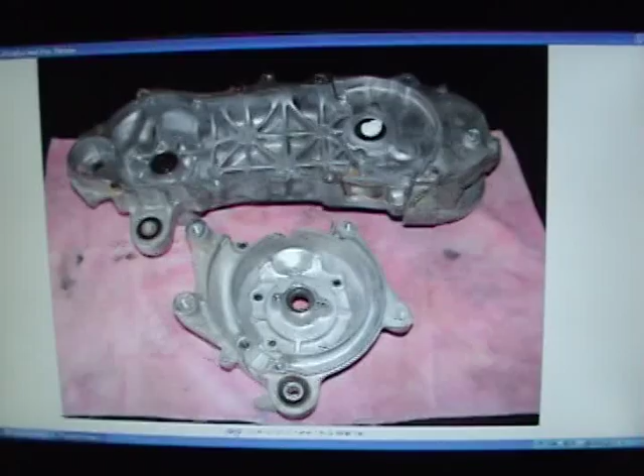This is going to be a long series on how to build a stroker from the ground up, starting with the engine cases. I was going to put it on rental and make a few bucks, and then I decided, well, what the hell? If we don't teach the young or help people out, what the hell good are we?

So we do it all for free. I know I'm slow, but just pay attention to the pictures. This is two halves of the engine. This is where your magneto goes, and this is the one seal that usually goes out.

If that does go out and you leak oil in that case a little bit, you won't have any high-speed runs. I've had two of them go out over the years.

There's your rear. What I like to do with these is take both sides of the engine, clean them up, and then run them through a dishwasher. That way it gets a lot of the crap off them, and then you can very gently scrape off any excess gaskets.

And you can see right here, this is where the oil pump went. It ran off the crankshaft, but it's not there anymore, so this plug will go right down in here. And that's important for a future deal.

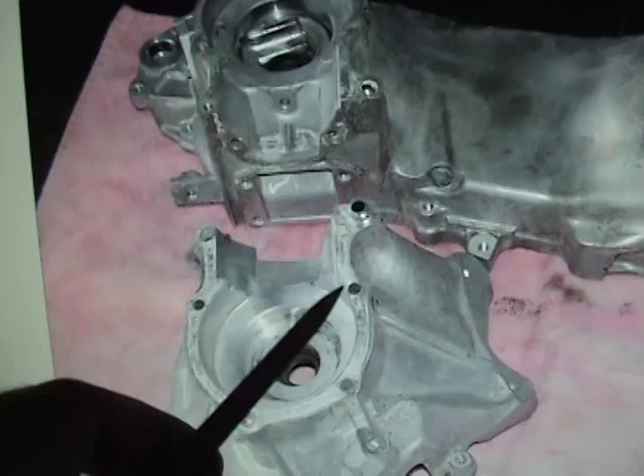And here's both cases on the insides. Now you can clean them and do whatever you want. On this area right around here, right around the case, this is where the mating half, here and right up in here. These cannot be nicked or touched. There is no gasket right here, so these have to be airtight when the cases are brought together.

This case will go onto here and the crank will go between them. So you want to be real careful about aluminum, because once you take it off it doesn't grow back.

And here's the intake side. There's where your starter goes. You won't need a starter with this big engine because usually it won't work. 98cc might work, but the other one doesn't. So you want to keep everything clean.

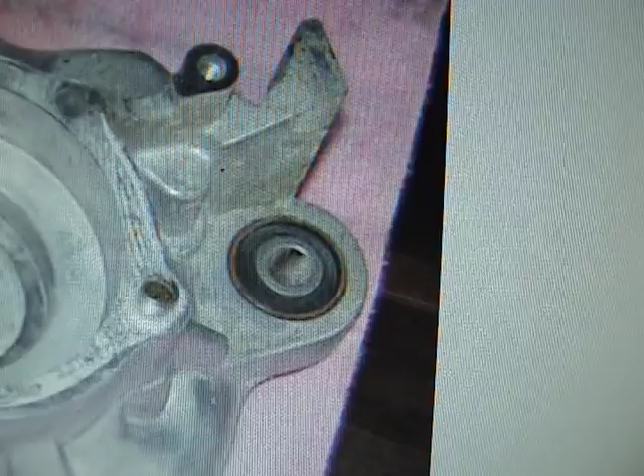These are your engine mount rubbers right here, and they don't come out, they'll just sit right there. This is where your oil filter, oil pump plug goes.

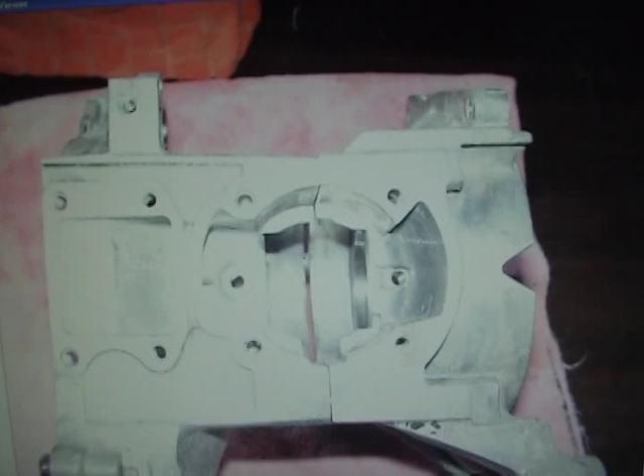This is a picture of looking down the barrel of the stock case, SR50 AF16E, I believe.

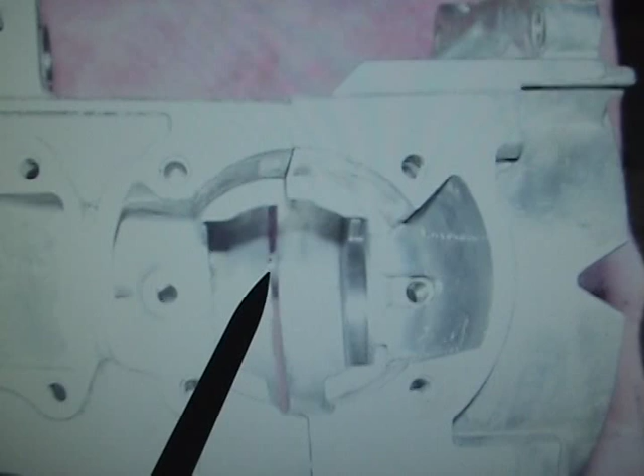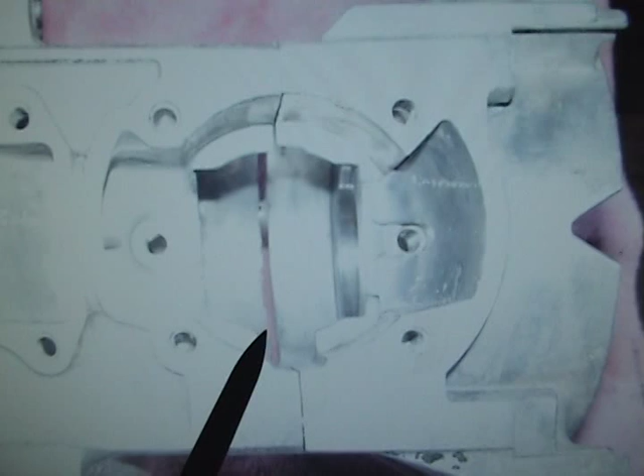Now these pins right here, there are two of them, I believe. There's one down here in the bottom and another one up here and here. Now, this is normally closed right here. I left it a little bit open to show you how the cases close together. If I pressed another 1/8 of an inch, then it would close it up.

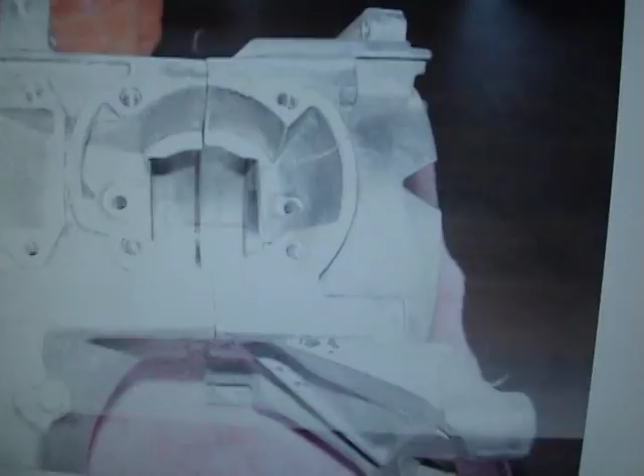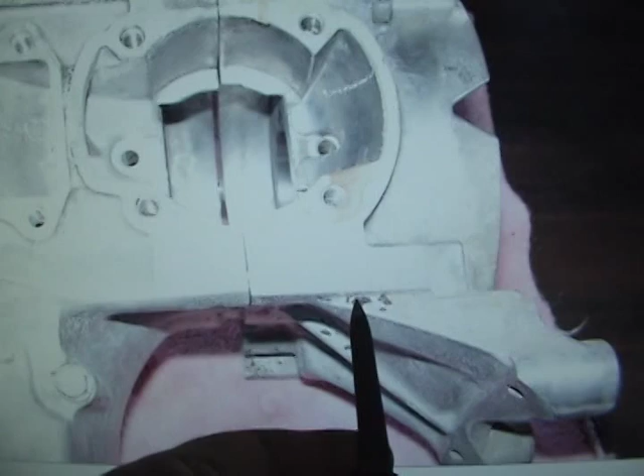Now the rear tire is right here, but all of this case here, and all the way down, all the way around the bottom and up here, must be sealed. There can be no air leaks here, no air leaks up here. This is your intake for one side of the cylinder, and this is your other side. Your variator is on this side. Your alternator flywheel is on this side.

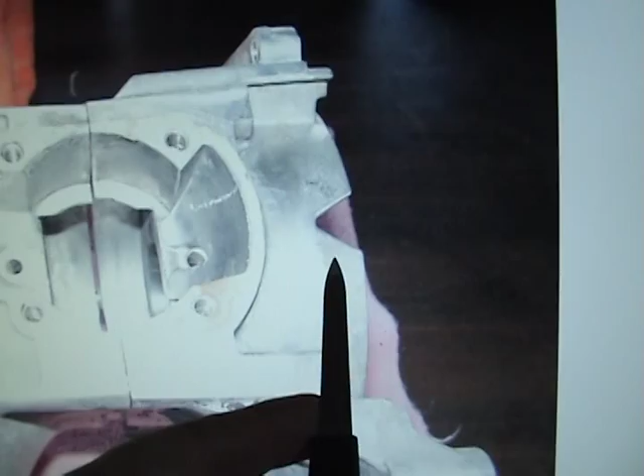Now, after you take your motor and put it in the dishwasher, you may have a little bit of gasket that needs to come off. You want to be very careful with that. Put some hot water on it, scrape it off a little bit. All this white on here is where the aluminum has little pits and holes in it like human skin, and this is oxidation.

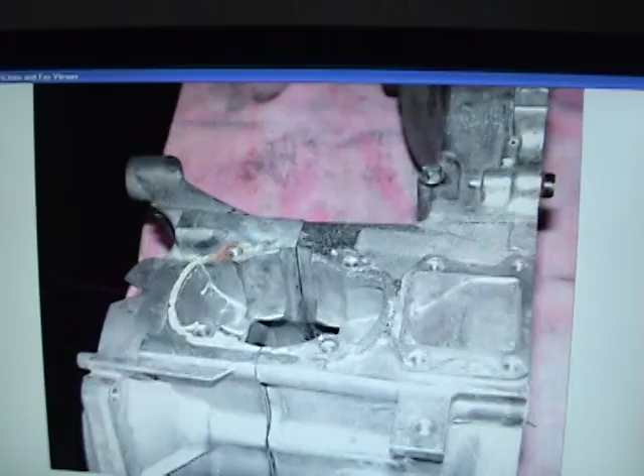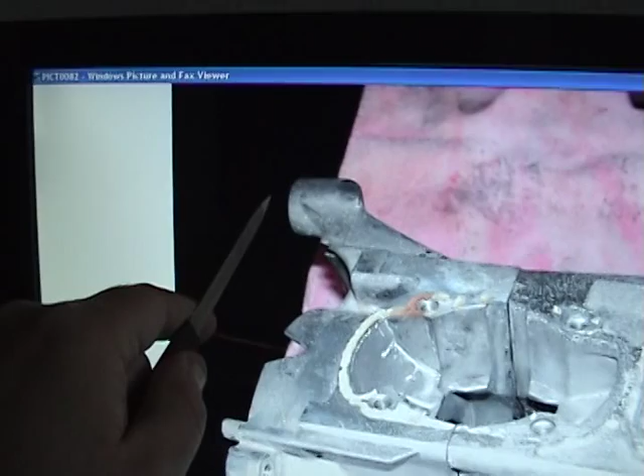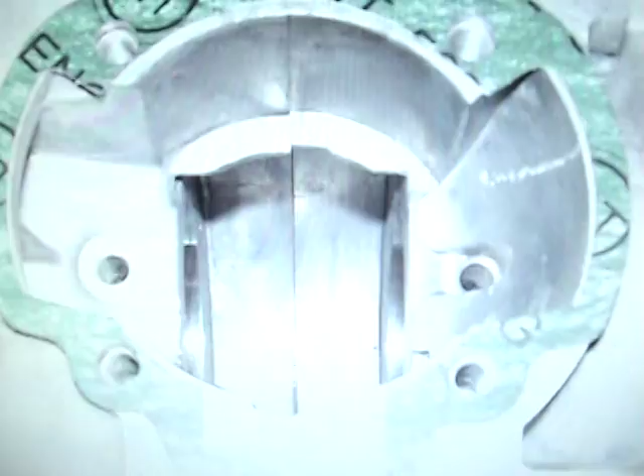Okay, now we have a 114cc Charmo cylinder up here. If you'll notice right here, this gasket was cut out especially for this cylinder, and you can see how much meat has got to be taken off the front and the back right here.

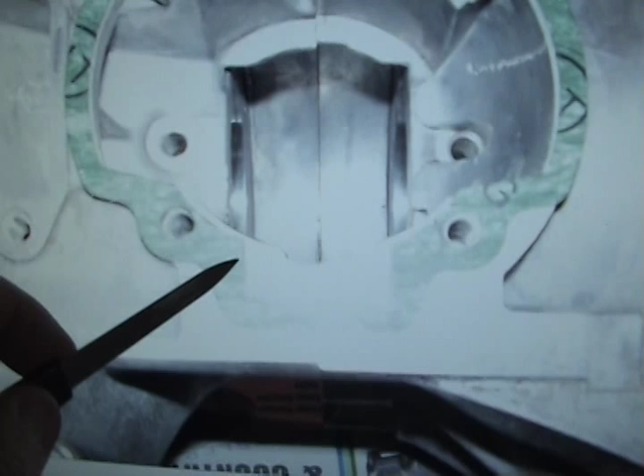And this is the area that's got to be cut out for the boost port. The stock boost port cutout is right here. Let's see if I can get a better picture on that. Yeah, this is your stock boost port cutout, rear boost port.

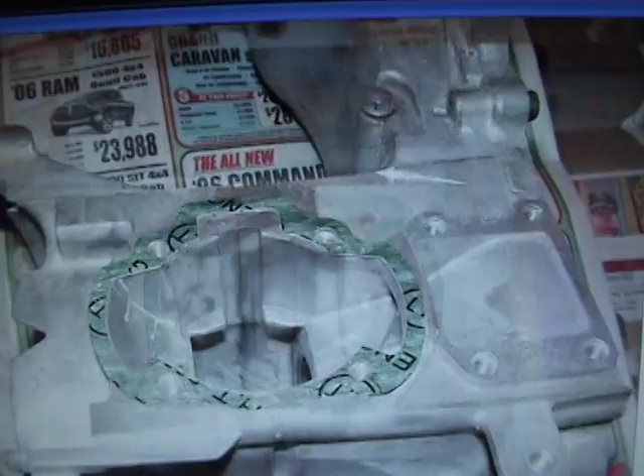So now I know how much we got to take off. Now, if you are building up to 107 cc's, I believe, you don't need to take off this back portion of the block or the front. It's only on the 114cc, the big one, 54 millimeter, that you have to.

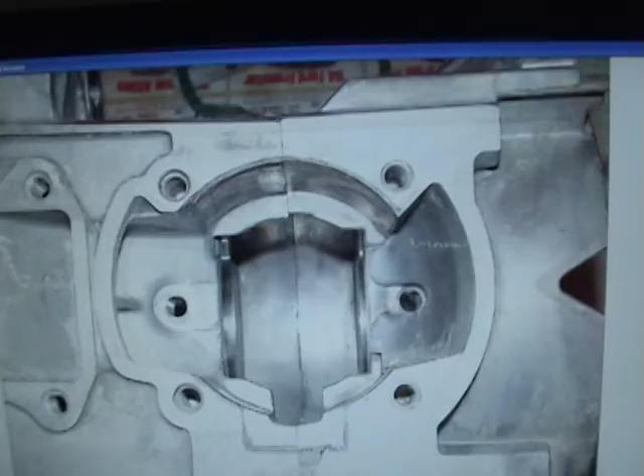Anyway, you can see with the boost port where I've—and this, we're gonna just take this through nice and slow. I've collected these pictures over the years, and I was gonna charge you sorry suckers for it, but now I've decided hell with it. I'm gonna do it all for free because I'm a nice guy, and I just want to show the world my work.

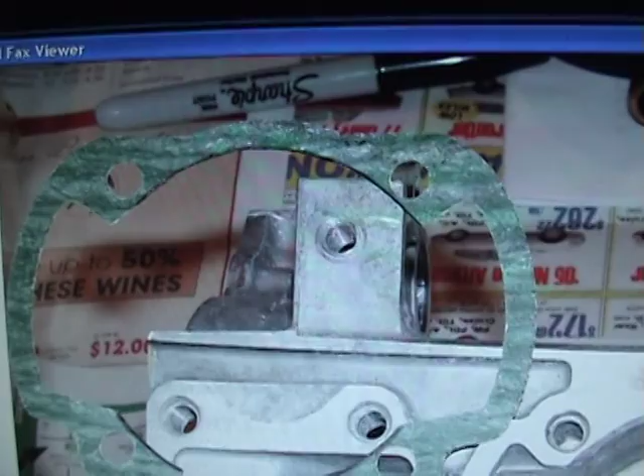So we have the cutout gasket here, and you have to cut out these edges right here and here. And it's not easy to do because you're going to get close to these bolt holes.

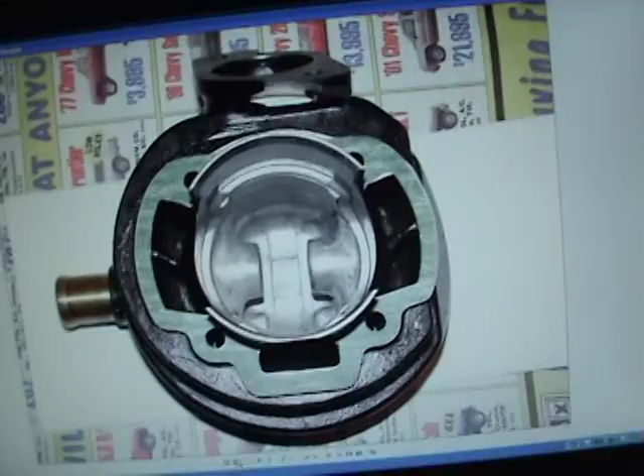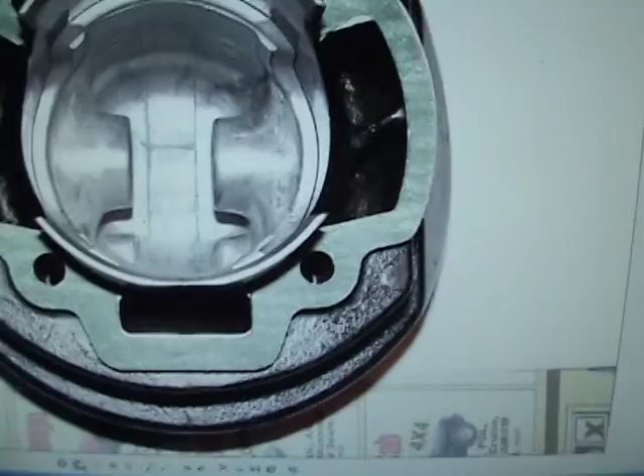This is your standard Charmo 114cc 54mm water-cooled piston and cylinder kit. This is part of the kit. This is a really nice setup for what I'm using, and as you can see, this stock gasket had to be specially cut to fit it because of the larger bore right around here.

Now, I've had 2 or 3 of these, and I really like them. They're a little bit different to work with, but you can see right back here, this is your boost port. If you look in the piston right here, you can see the cutout for the boost port.

What the cutout does is it allows the rear gases to enter the combustion chamber first, and what that does is the rear gases, if this were reversed, will come over the piston crown and push part of it out, thereby allowing a fresh new charge to come in. Because if you have wasted gas or fuel in the cylinder, you're not going to get as big a bang.

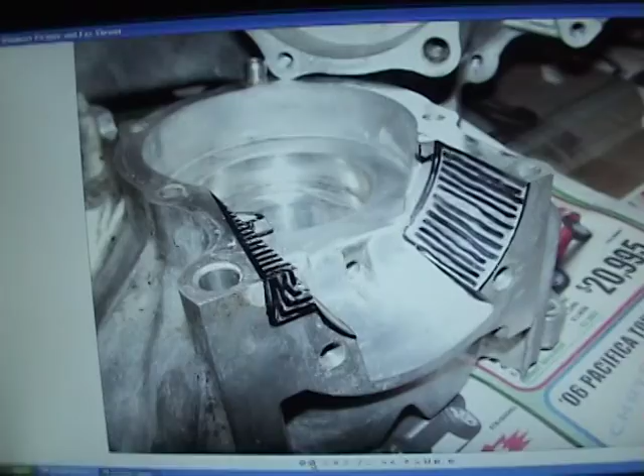Now here's where the rubber meets the road. This is one side. Like I said, all these pictures are 1200 by 1600. They're highly detailed because when I took them, I wanted to do them right.

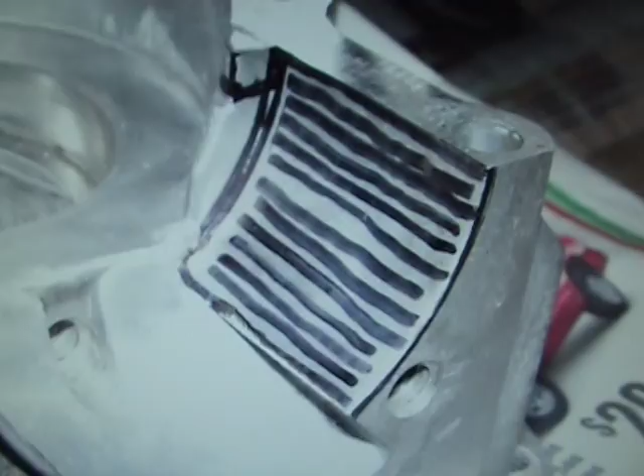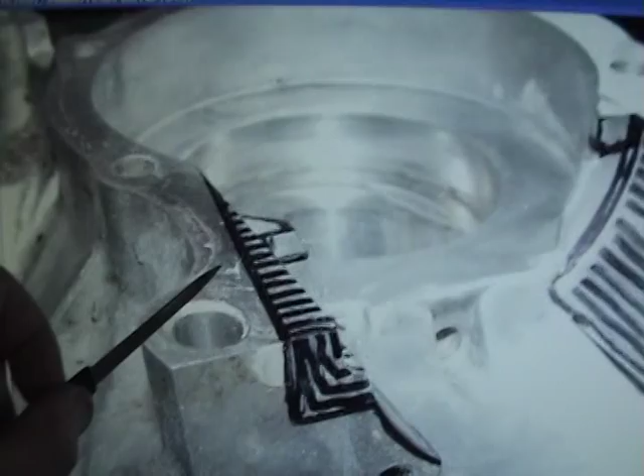This area has got to be taken off, and you can see right here, this is the edge of the gallery right here. What this does is keeps the oil down in here, I think. And then this is the edge of your boost port here. It has to be taken out. And here, this is all for the larger 114cc 54mm cylinder. That's what I'll call it.

And here's the other side. I have so many pictures that it's going to be hard to put all this together, but remember, I don't do any editing. I just say what I feel at the time, and I put it up there, and that's the way it is.

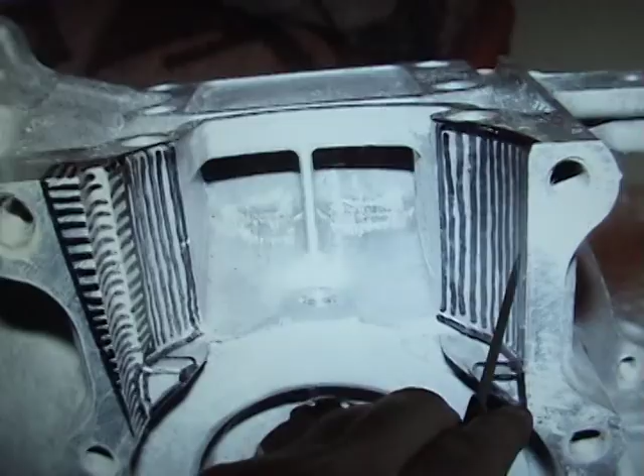This is your intake right here. Your CT manifold goes right up here. In order to put the big manifold on, you're going to need to cut this little part, and this back part. Now, if you were doing just a standard stroker crank, all you need to do is cut the, I believe it's 50mm. All you need to do is cut this boost port.

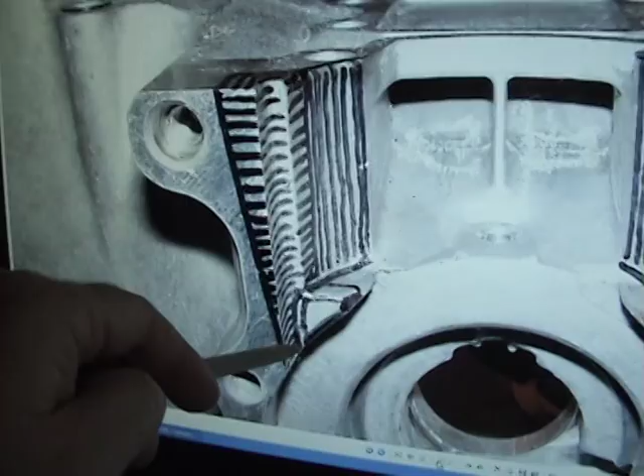As you can see, the boost port is right here. The stock one, all we're doing is make it a little bit bigger. And that's the easiest part of doing that. And here's the other side, what's got to be done.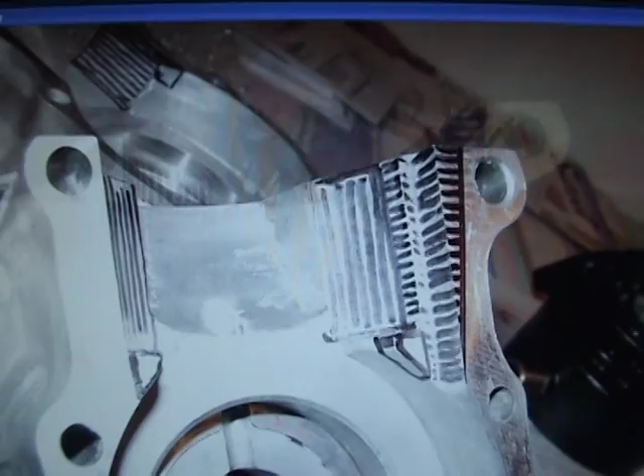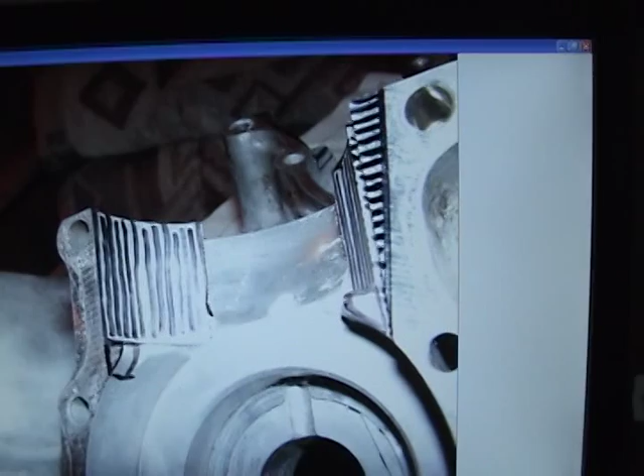And I've learned all this by myself through trial and error, because I don't have anyone I can ride with. And you know, you guys in Hawaii and everything, you've got friends that have done this and that, and everyone's got a million bikes, and you can ask for advice. I don't have anyone to ask for advice. So if you experts in Hawaii, and God bless Hawaii, see that I'm screwing up or I'm doing wrong, it's not because I think I know everything. It's because I don't really know that much.

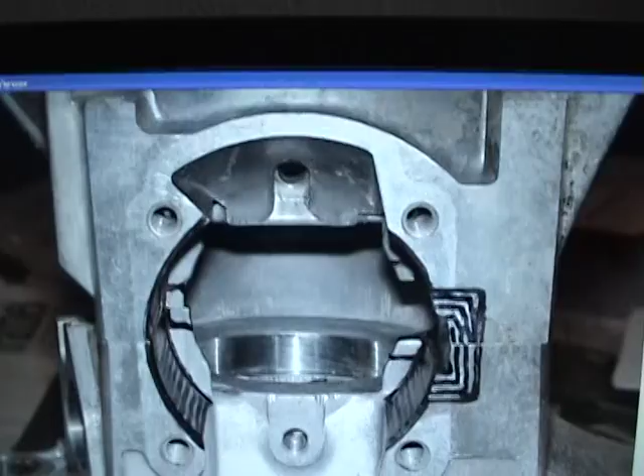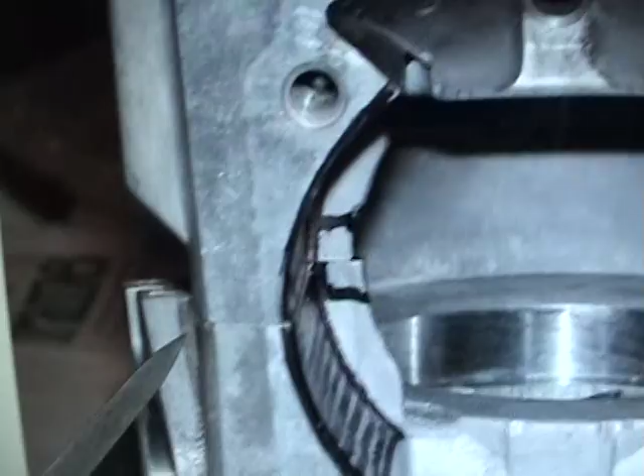And we can see the boost port here and where it's got to be cut out. And you can see the back and the front where—and these have to be, you cannot touch this. You cannot touch this area here.

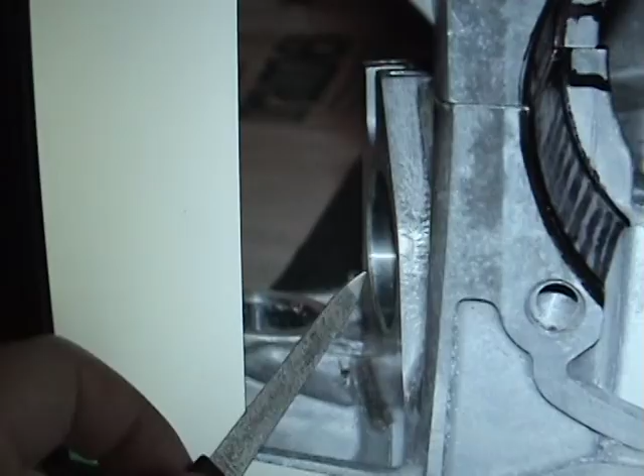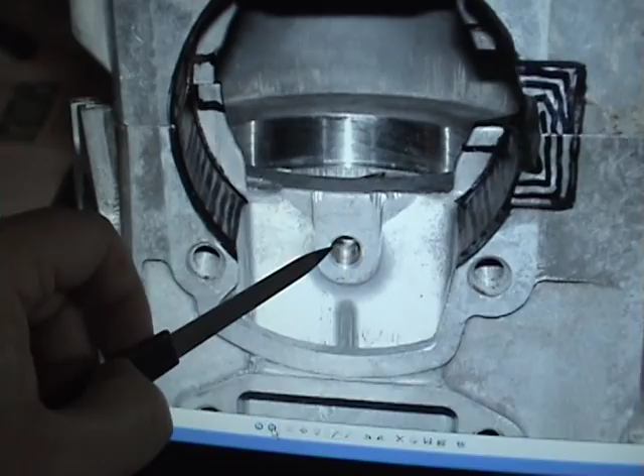And this is where the oil pump went. The plug will go in, and it will go all the way down and stick in right here. These two little holes are made for when the gas or fuel comes in, it has oil in it, 40-50 to 1. And this drops down and into the bearing races, and then what that'll do is help oil the bearings.

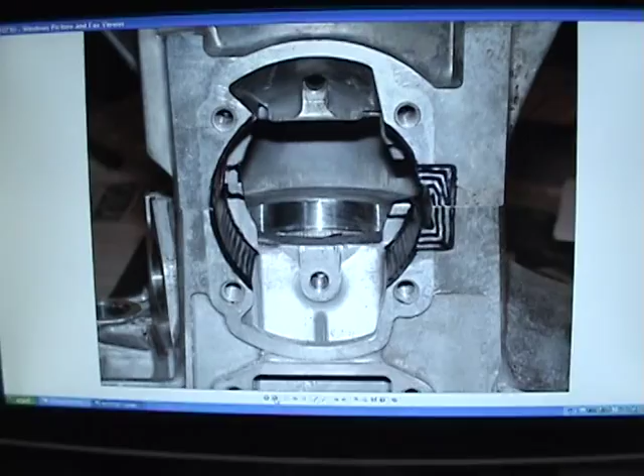Okay, we're going to go to part 2. This could be part 6 or 7. I hope anyone building a stroker motor can use these. I don't know it all, but I do have a lot of pictures.